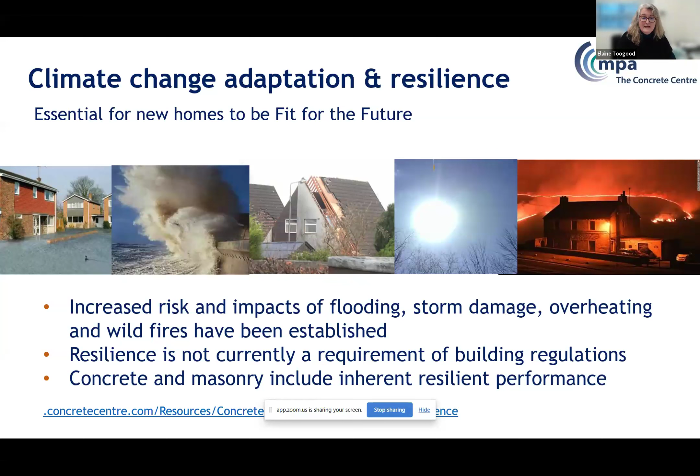But of course, quality and performance and sustainability isn't just there. There's a wide range, and we need to be reducing carbon emissions in new homes, so that's through energy use, but also through embodied carbon. And that embodied carbon piece is, as you might expect, a real driver for innovation with regards to concrete.

So it's a big area that I'm going to be looking at in this presentation. There is a huge amount of innovation taking place right now with regards to reducing the carbon footprint of concrete. Hopefully you're all aware that there is a UK concrete and cement industry roadmap.

It's been around for a few years now. It was published in October 2020, and that was already building on good work that was already in place and in action. There's been some good progress right across this whole range of seven technology levers that have been identified, all necessary to achieve beyond net zero by 2050. So far, a 53% reduction in carbon since 1990 has been achieved by concrete in the UK.

But of course, there's still more work to do, and there's going to be an update on progress published very soon. But you can get a lot of the details about those different technology levers through that QR code on the slide there.

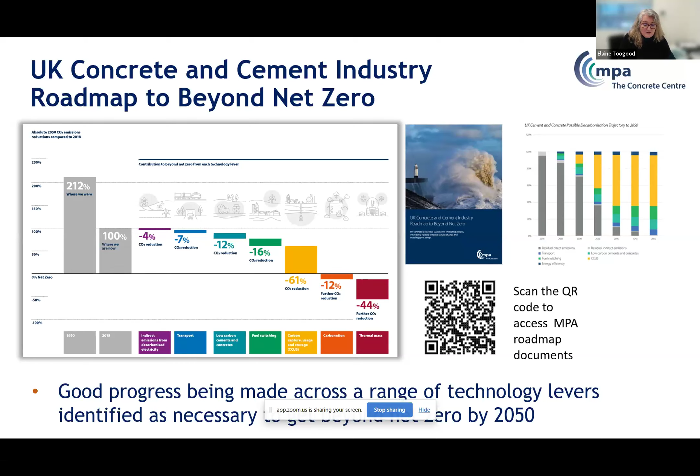Now, as I said, it's impossible to go through all the different action and innovation that's taking place, but I just wanted to draw attention to this article that was published just under a year ago. It's still a really good one to look up about the range of different things that are going on within the UK, and you can pick this up from our website.

In this presentation, I'm going to run through probably 5 or 6 themes of decarbonisation activity that's going on. So we'll do a quick fly through. The first one is innovation in manufacture of Portland cement.

For those who don't know, cement is the main thing that brings the embodied carbon to concrete, so there's a lot of focus on activity related to cement. Aggregates, which are most of what concrete is made out of, actually are incredibly low in carbon and usually locally supplied.

In the manufacture of Portland cement, about 30% of the carbon associated with that is a result of the fuels being burnt, since really high temperatures are needed. So fuel switching is one of the areas of early intervention the industry have been looking at. The latest figures available in 2022 show about 50% of the thermal input was provided by alternative fuels, a lot of them waste-derived, so switching away from fossil fuels.

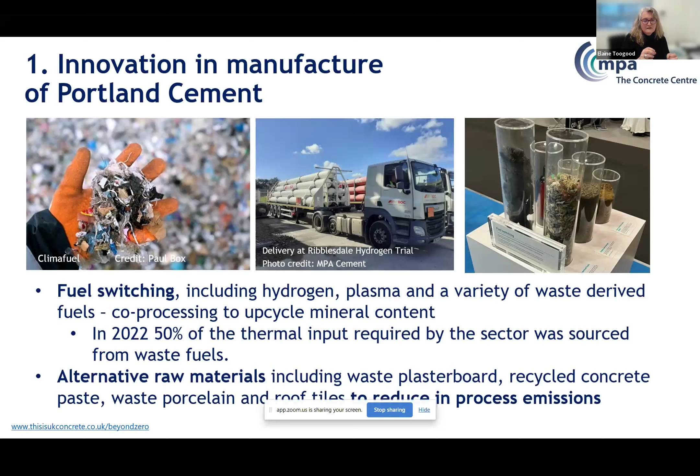It's not the only area of innovation with Portland cement. The other is alternative raw materials in the making of it, including waste plasterboard, recycled concrete, waste porcelain, and roof tiles, all to reduce in-process emissions — changing the recipe of the cement so less carbon is produced in the process.

Now, those process emissions are due to the chemistry of making and using Portland cement, and at the moment they account for around 70% of the overall carbon emissions associated with it. So these are going to need to be captured — carbon capture, use, or storage is going to be necessary to reduce these.

A few years ago, this technology was seen as quite futuristic, and a lot of people didn't really think it was coming off, but there's been significant recent progress. At the moment we are on track for the UK's first carbon capture cement plant to be up and running at Padeswood by 2029 — really exciting and significant progress there as one of those levers for decarbonisation.

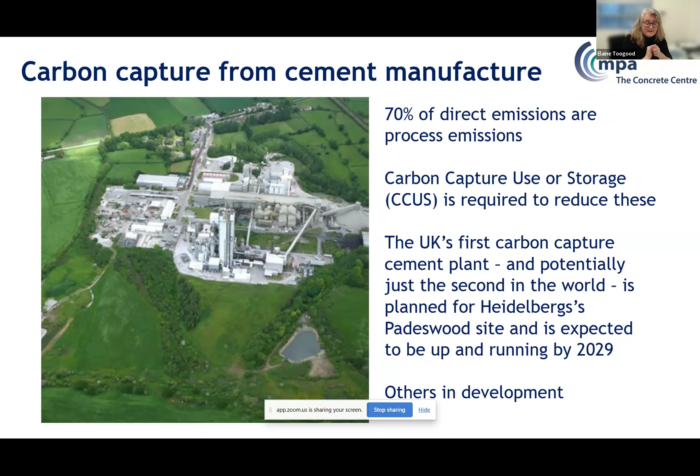There are lots of other sites as well that have been identified, and there's a lot of international collaboration to develop the technology for CCUS. The other area is lower carbon cements and concretes.

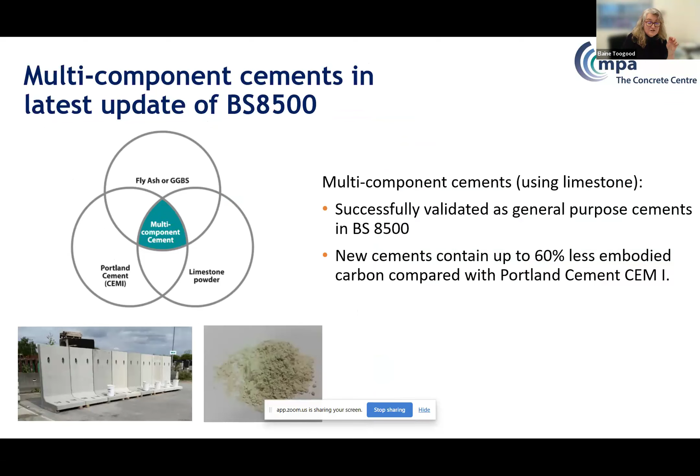This is a hugely exciting area of technology. Recently there's been new cements available through BS 8500, using limestone, which is less carbon — a different way of blending. There's different alternatives to reduce the amount of Portland cement, using limestone and either GGBS or fly ash. And calcined clay is hot on the heels of that.

There's another government-funded project that MPA have been running, looking at UK sources of reclaimed clay to be calcined and used as a potential alternative for expanding the range of lower carbon concretes available.

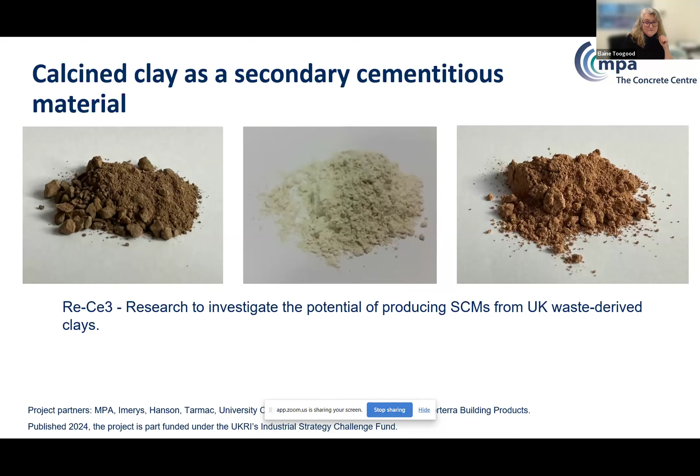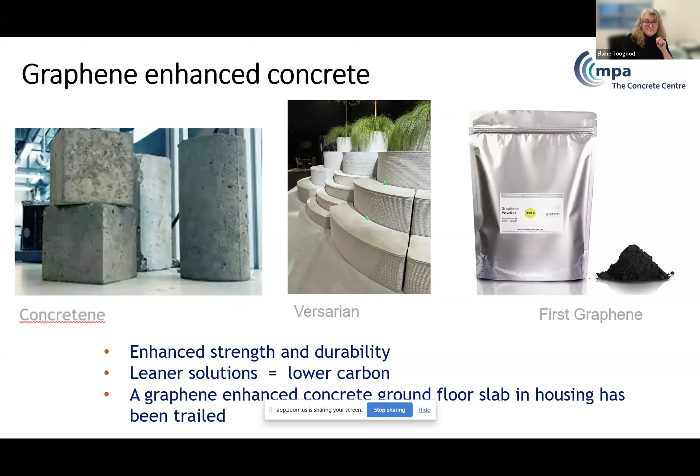Graphene enhancement is another area of interesting use. It improves the durability and strength of concrete, potentially providing leaner construction, so less carbon — whether that's in the making of the cement or as an admixture. There's interesting work being done by a variety of people across there, and in fact a concrete floor slab has been trialled in housing in the UK, as well as trials by some precasters using graphene enhanced concrete.

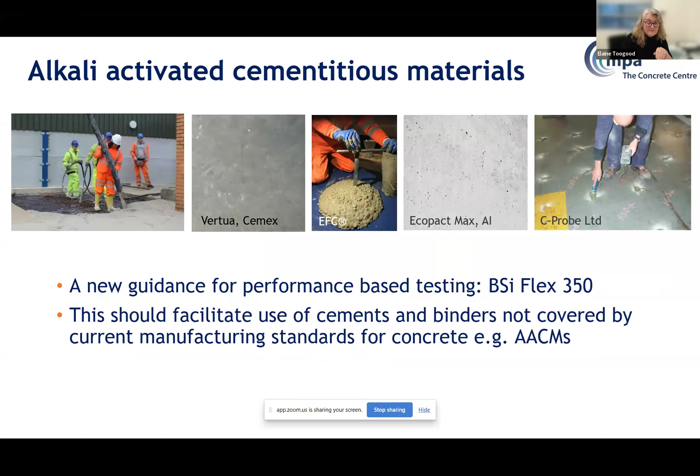There's alkali activated cementitious materials, another form of binder for concrete, becoming more available. There's a new PAS guidance that's been provided to help and facilitate the use of these types of cements, which are non-standard and not covered by current concrete standards.

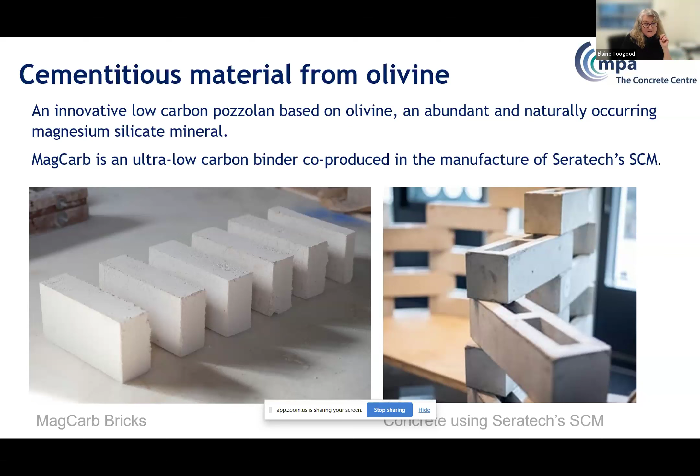There's also research and some trials starting for different technologies, different bases for binders, including Seratech's use of olivine as a raw material — a completely different technology as a basis for cementitious materials potentially to be used in concrete.

There's also new uses for recycled concrete, a really interesting area of activity — whether that's crushing the concrete at the end of its life to tap into its carbon capture potential, enhancing aggregates for use within concrete, or brand new concrete products being developed, such as that produced by Cambridge Electric Cement.

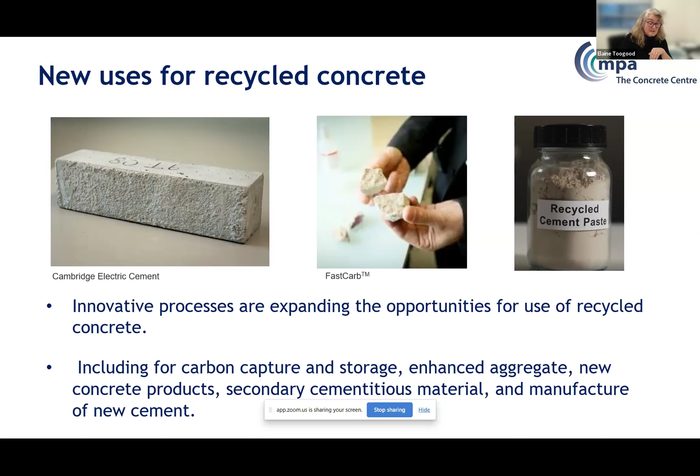It's also potentially, there's lots of research going into recycled cement being used as a secondary cementitious material and in the manufacture of new cement as well. A very exciting area of work that's going to reduce the carbon footprint for all concretes potentially, and that would impact on reducing the carbon footprint of housing in turn as well.

Another area is innovative industrial carbonation techniques, so that's about actually permanently embedding that captured CO2 into the concrete as part of the manufacture. It's another area of work, and there's so much more we could be talking about there, but we don't have time.

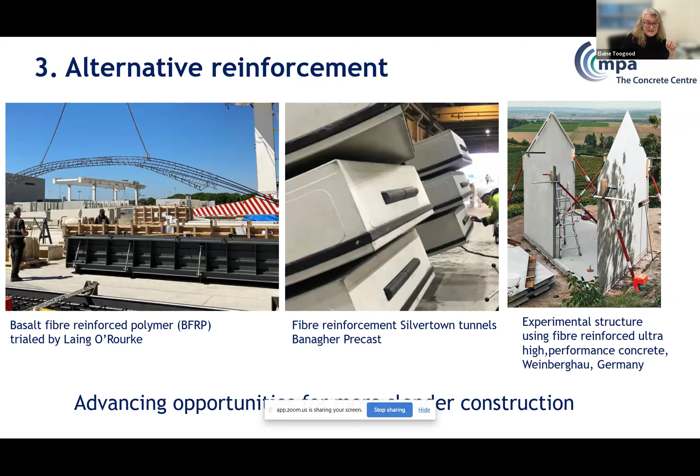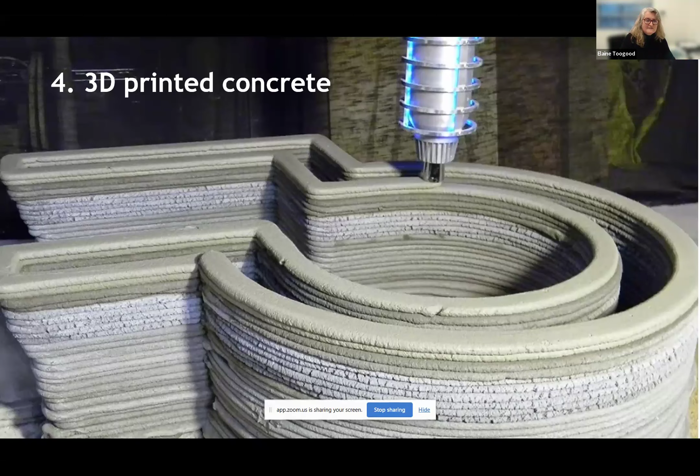So the third one is alternative reinforcement. Really interesting - if we can get alternative reinforcements in there, there's a real potential for leaner forms of construction. There's lots of research taking place by MPA members of precast, looking into getting more slender solutions by alternative reinforcements. 3D printing, obviously, that's usually the first thing people come to when they say I'm looking at innovative concrete.

It's a completely different way of transforming the way that we place concrete as well as make it. Now, in the UK at the moment, there hasn't been any homes built, or certainly not that I'm aware of - if anybody knows, tell me. But there has been a growing number of printed buildings and homes internationally, including both prefabricated 3D printing and in situ solutions. In the UK, there has been some trials for some infrastructure.

So this really complex bit of concrete that's been installed in Cornwall in 2023, and there's some other inspection chambers and things being manufactured. So it is a really interesting area of evolution, and I'd be remiss not to include it in this talk.

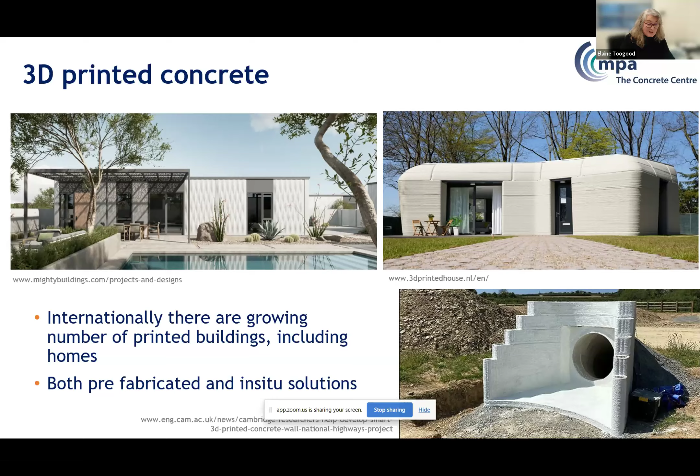But my final and fifth innovation relates to digital technology. This could be AI and machine learning in manufacture and construction. I'm not going to go into great detail because Dan is going to focus on some of the ways in which the PCE have been using this within construction, but it's a really important area and thread of enabling other technologies as well.

So whether that is about digital sensors being embedded within the concrete at the point of curing to facilitate early striking of some of these lower carbon concretes.

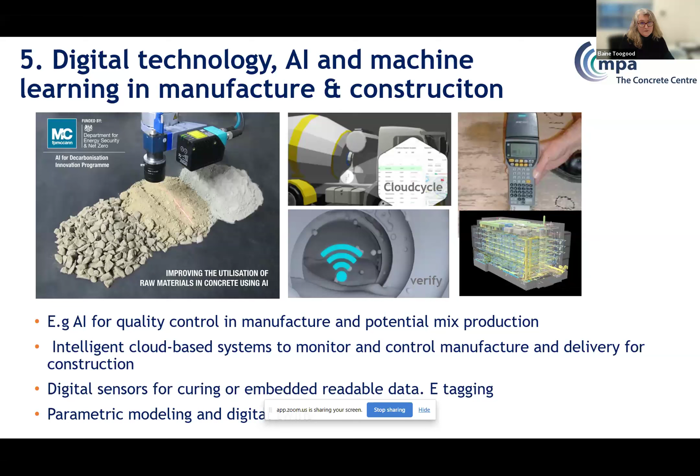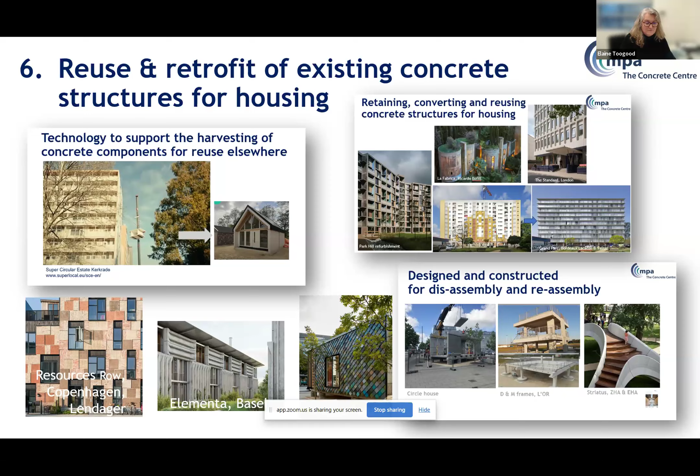So it's a really exciting area of research going on as well that can impact on the way that we build homes. So that was a very quick fly through - I hope you found that of interest. Of course, we've got lots of guidance on the website through various different places, and please do ask me some questions if there's anything else you want to find out a bit more about, but otherwise we're here to help.

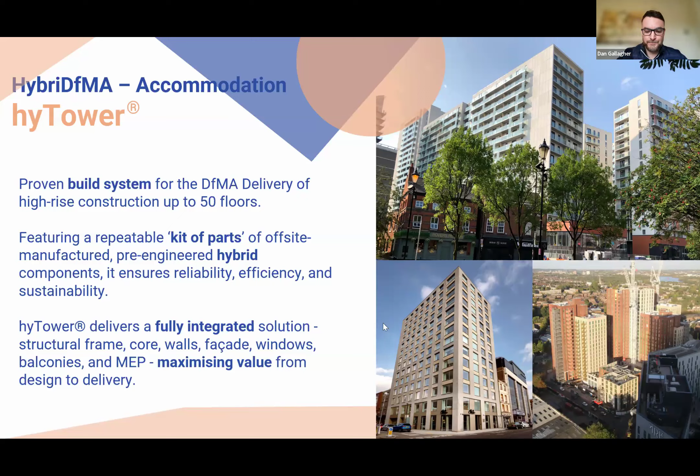A little bit more about the hyTower system specifically. It's founded on a kit of parts approach, so we pick our units from a systemized library. We then utilize digital technology in order to track those units throughout the concept design stage into detailed design, throughout the manufacturing processes, and then as they get to site, tracking where they go in, where they get installed on site, all of the QA around that, in order to make sure we've got that golden thread and single source of truth, which I'll touch on a little bit later.

As I've already touched on, the thermals and acoustics are a natural byproduct of concrete, and we also bring a lot more to the party in terms of air tightness. Passive house standards are something we can achieve utilising our system, as well as deploying it in areas like hospitals or research facilities that have high specification for things like vibration.

What we tend to find is that over traditional builds, we're up to 50% faster in terms of on-site activities. It does dictate that a lot more work has to be done off-site earlier, so that sometimes changes things like funding models, and people have to come with the right type of mentality in order to deploy a DFMA solution. But we're also then able to deploy fewer deliveries to site, reducing carbon footprints and disturbances to neighbours in tight inner city areas.

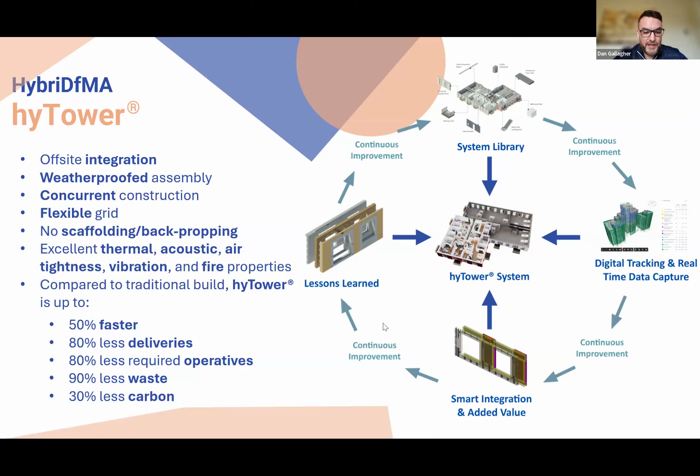Because we are able to refine the designs and do things in controlled environments, we also use a lot less materiality, whereas on site materials are brought, things are cast, and there's a lot of wastage that goes in the skip, a lot of formwork and what have you. We do everything fit for purpose in a controlled environment, which enables us to drive down that wastage factor, and as such we also get some better carbon credentials as well, which are really maximised when we do get that early engagement.

As a brief overview of what this DFMA journey looks like, we like to get involved nice and early. That enables us to talk to the client team and the wider design team and ensure there's no decisions taken which funnel us down the wrong avenue, where we're then trying to put a square peg in a round hole with regards to a traditional build versus trying to deploy a DFMA solution as best we can.

We do a spatial design in order to make sure we're hitting the architectural and engineering intent, and then move that through stage 4 into detailed design, at which point we produce shop drawings. That goes into a manufacturing environment where those units are produced off-site, QA'd, and tracked digitally until it's ready for on-site, transported to site in a controlled fashion, in line with the pre-developed build sequence. Then we have the lifting and installation sequencing on site, in a systemized approach.

This enables us to hit cycle times that often start a little bit slower, but once everybody understands how things come together and the predictability factor starts to kick in, those cycle times decrease over time until the building is complete. And then we have the handovers for the end client.

Because of the digital twin technology we deploy and that traceability, the birth certificate that stays with every unit from the spatial design stage right through to handover will track everything from materiality, who manufactured it, what's been cast into it if it's a precast piece of concrete, all of the structural tie connections, any remedials, and its specific geolocation on site, so everybody understands the full history of that unit until it's in its final resting place.

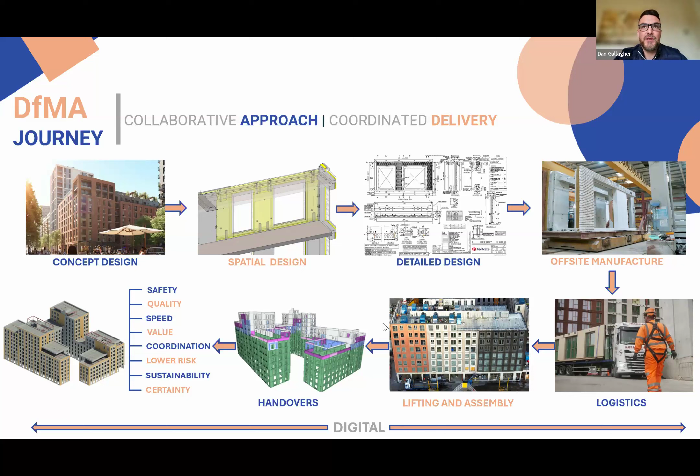The predictability itself carries less risk through to development at the project stage, so people understand what's happening day to day, hour to hour, so that you can plan accordingly, which is inherently also a lot safer. And then we're able to drive down those sustainability credentials as well by really refining that design and offering our clients the certainty that they need.

So this is the RIBA stages of work, for those familiar with it. Most people are familiar with these stages. I'm not going to go into too much detail, but the thing I really want to hone in on is that whilst people understand the RIBA stages of work, not everybody is aware that there is a DFMA overlay for the RIBA stages of work, which are specific to deploying an offsite strategy.

We feel it's absolutely key that we get involved as early as possible in order to fully harness all of the benefits of a DFMA strategy, so that we can then go through the develop design, the manufacturing strategy, and the on-site assembly strategy with all of the positives that can be deployed from an MMC solution.

As I've already touched on with some of these benefits, we do optimize the design. We feel we can look at other avenues, as Elaine has touched on, better forms of concrete where it's practical. We can look at reinforcing, or only providing reinforcement in areas required based on the strengths needed, rather than traditional reinforcement everywhere to a particular standard. That enables us to really drive down reinforcement content.

We've got the waste reduction, which I've already touched on. We value engineer, which is often something that's challenging on a project when people are trying to drive down costs or understand how they maximize what they're paying for. And that added value and coordination piece enables us to cast things into our precast products that then facilitate follow-on trades.

So we put the openings in our units that allow the ductwork to come through, predefined and fire stopped. We have single risers that get dropped into place, so it's a single plug and play system. And we really do that by buying everybody into the team and being able to get them on board with that DFMA strategy.

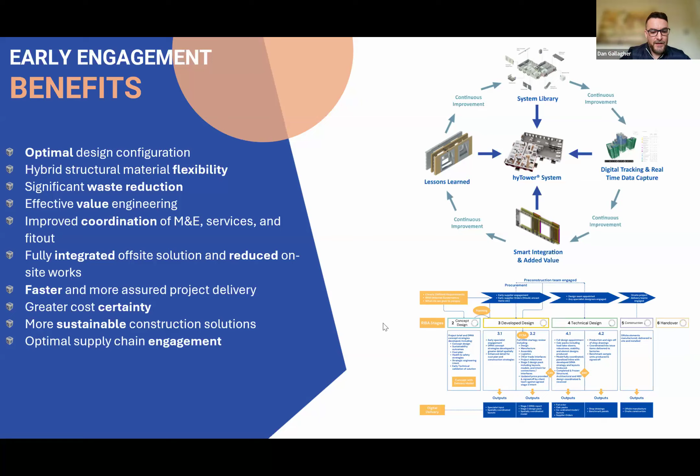The real strength of being a hybrid DFMA solution is that whilst precast concrete has an awful lot going for it, one size never always fits all, unfortunately, and we recognise that. Because we don't own any manufacturing facilities, we instead rely on the supply chain and the good relationships we have. We're able to procure the products we need and put them in the right place at the right time, so we're putting our best foot forward for project delivery.

So that sometimes emanates in terms of precast concrete beams and precast concrete slabs, but it could also be timber, it could also be composite beams. We're not really hung up on doing it one way. We instead look at all the credentials of pulling all of the kit parts together in order to get to the best solution possible.

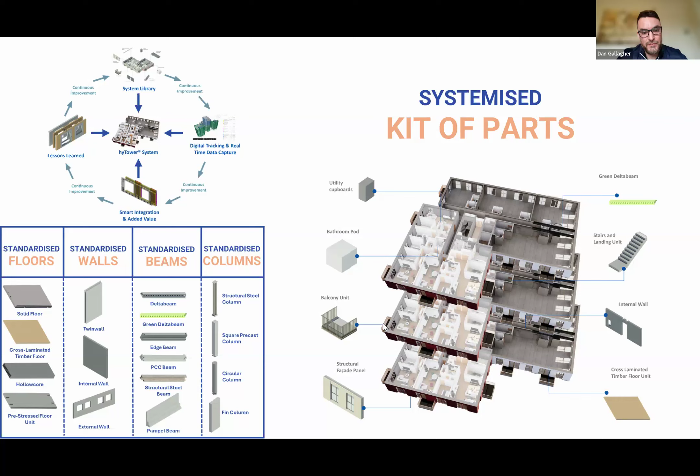That systemized approach and the predictability it brings means we're picking things out of a catalogue that have been tried and tested. They've been through thermal, fire, water, acoustic testing, air tightness and vibration testing, and we're able to demonstrate and validate and verify to our clients that what they're purchasing is fit for purpose. And we have all the traceability throughout the digital twin tracking in order to justify that.

The integrated systems, the facades can be brick, concrete, coloured concrete, or patinated concrete. We're able to install the windows into the panels as well, which gets away from any scaffolding around the outside because it's an integrated part of the system. Integration with the MEP, as I've already touched on, casting things in or facilitating underfloor heating being in place, so it's just tested on site rather than off-site.

And then we can drop in things like pods or risers whilst we're building, so that we've got fewer trades on site. We're not bringing other people in, so the client only has to deal with us, and we're bringing that added value. We're also able to install things like balconies and roofing at the same time, which again just drives down that manpower on site.

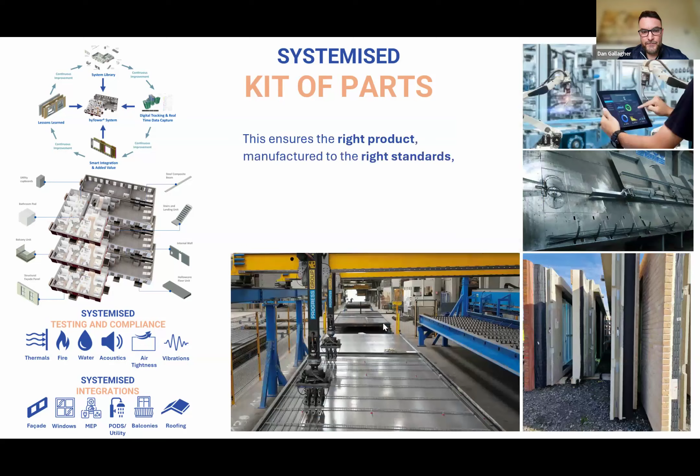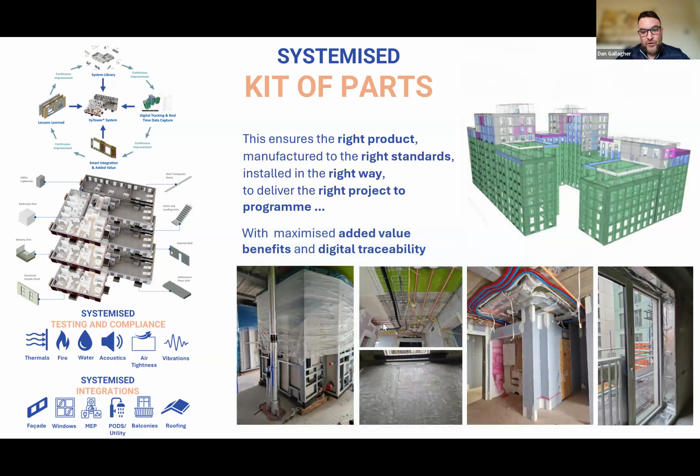So as I've touched on, that enables us to get to a place where we're putting the right products in the right place, doing it to the right standards. We have data backing up our solutions, making sure they're fit for purpose, they're robust. As Elaine touched on, we want solutions that can stand the test of time. And then we're able to track it all and provide transparency to our clients through digital traceability.

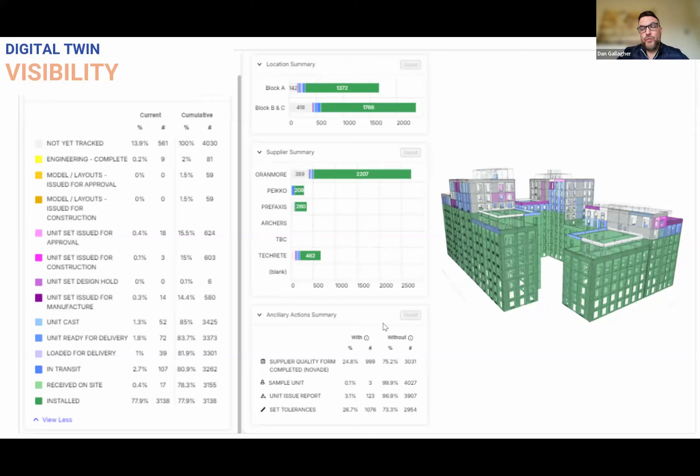So just touching on that digital twin visibility, this is something we've developed in-house because we're absolutely adamant that we don't just want to utilize it for our own benefits. We want to give that transparency to the client team so they understand whether we're on program, where problems might be, but probably more importantly, how we're progressing with regards to the program, so they can start thinking about those follow-on trades in order to reduce the overall times for on-site activities.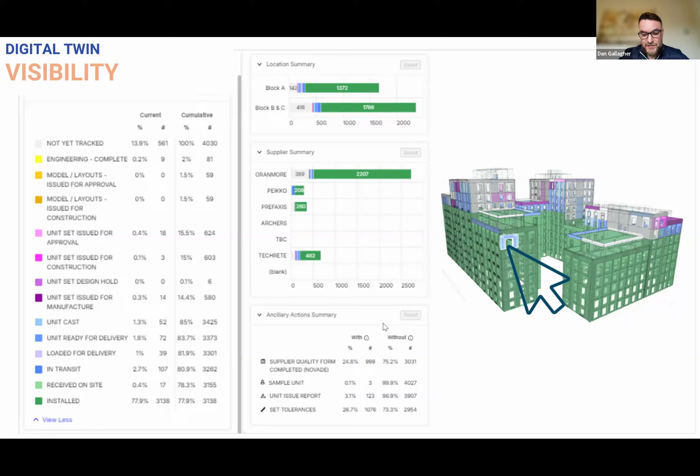And we do that using a system called Winomia, which takes elemental pieces of the overall structure and tracks them throughout the design process, throughout the manufacturing process, and throughout the on-site process. So in this instance specifically, we can click on one unit and have the full history of that unit with regards to the journey it's been on through its manufacturing and design process until such time as it gets to site.

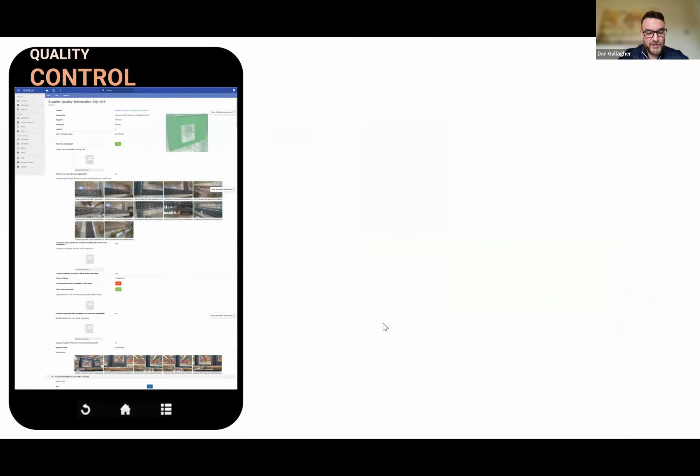This is all done in a digital twin. So as people are quite familiar with 3D technology these days, you can rotate, you can zoom in, you can find the unit specifically you're looking for, you can click on it, it will expand out, it will give you imagery with regards to that journey it's been on, it will give you all the details about it.

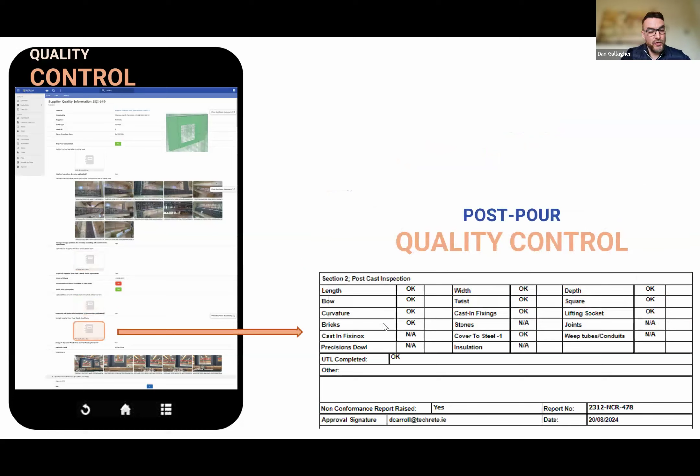And then it can give all your documentation that sits behind it as well, whether that's the quality control, the photos, or the sign-offs, just to validate that it's ready to come to site and can be installed. And that's the full digital twin technology throughout, as I say, all three parts of the project: your design, your manufacture, and your construction.

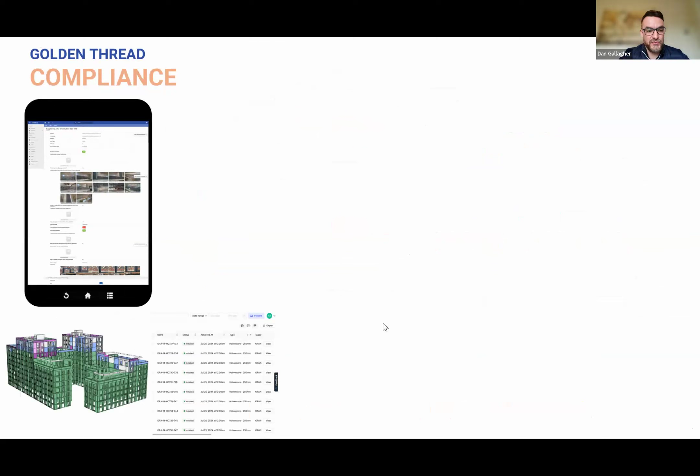And we really feel that in order to do that, if ever we need to come back and find information through O&M manuals rather than trying to find paperwork or individuals, it all resides within a 3D environment where people are free to go and find that information, whether it's design related, quality related, or structural integrity or fire related.

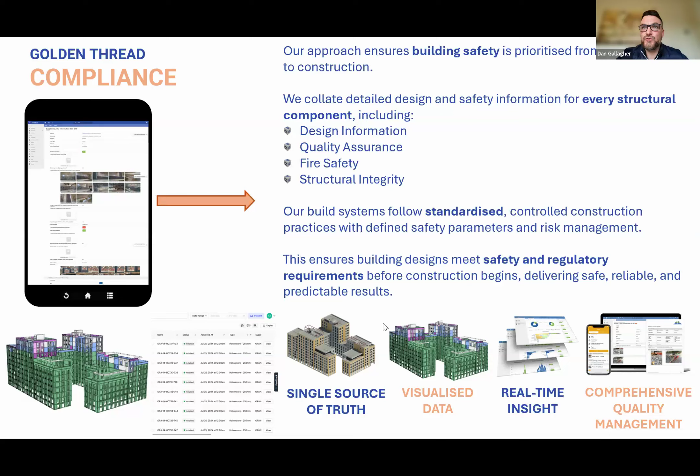So all of that enables us to have a single source of truth which aligns to Gateway 2, making sure everybody understands where they're going in order to find that information they require for their project. It's visualized, so it's easily accessible. Throughout project delivery itself, it gives real-time insights and visibility client side, so people can understand how their projects are progressing. And all of that enables us on site to have a comprehensive management tool for understanding where we need to focus our attentions at any given time.

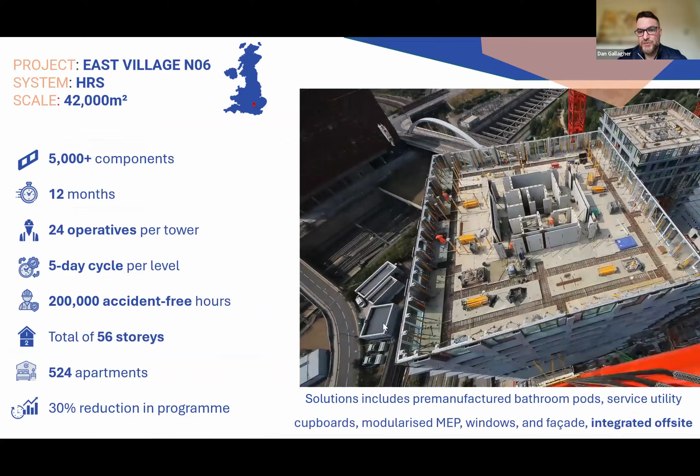Just a few working examples now. This one is a project that has already been delivered. The video on the right-hand side is really demonstrating those cycle times I spoke about with the repetitive nature of things being installed. You'll be able to see the core in the middle, and you can see some pods being dropped in with that added value piece.

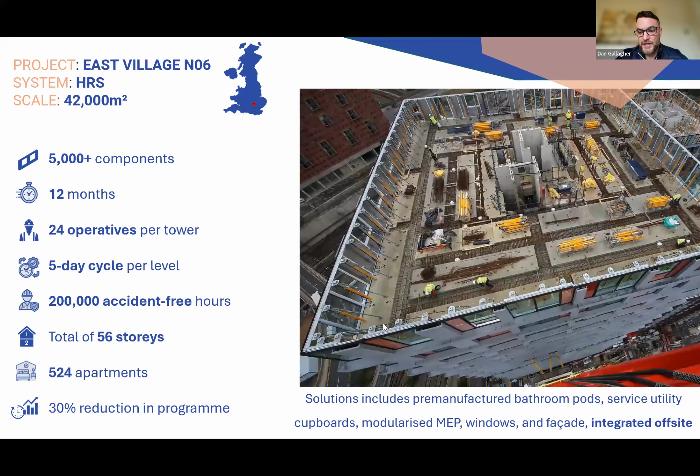But this is a high-rise residential scheme called N06, which is East Village in London. This had over 5,000 components and took only 24 operatives to build, and it delivered 524 apartments. And over the original scheme, which was an in situ scheme, the client confirmed that we were 30% quicker than if they had gone with a traditional build solution.

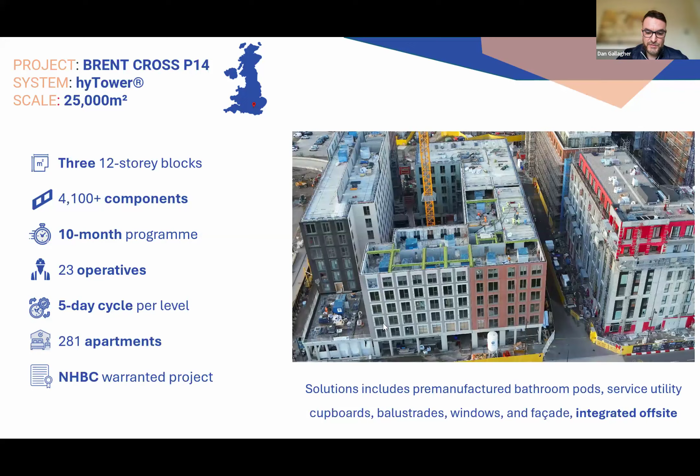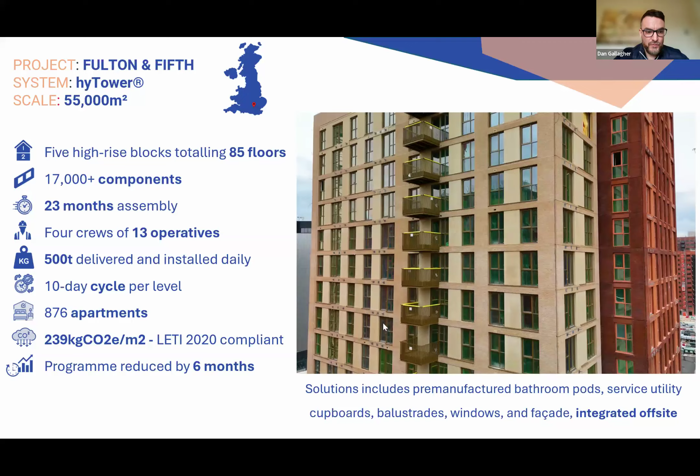Again, another project in the centre of Wembley. We've got the Wembley Arch in the background. This is five towers that we're currently delivering. It's a 10-day cycle typically for being able to go from level to level, so we've really refined the ability to build with speed and certainty. And we're on site for about 23 months, installing just over 17,000 components.

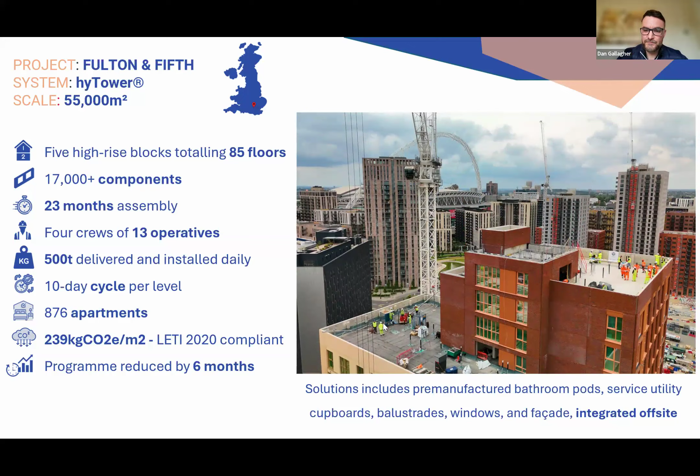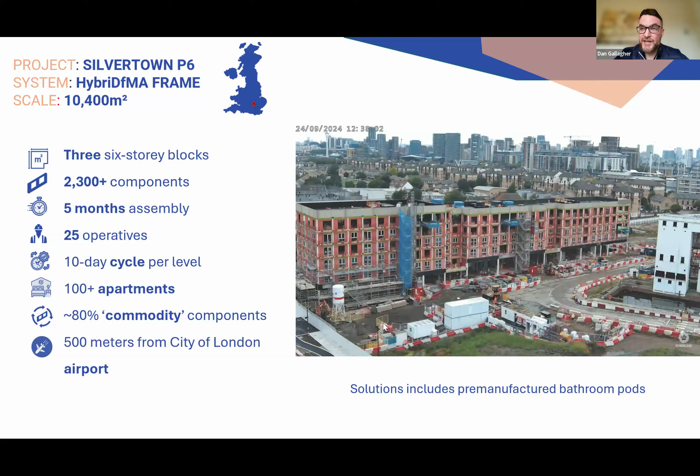And then finally, just a bit of a digital representation there on the first image, and then a cycle showing how we've delivered a project called Silvertown Plot 6. This encompassed some affordable accommodation as well as some shops and office space and what have you. So there's lots of different ways that we can try and answer this housing crisis, and we've got a lot of solutions in hand and innovation that's ongoing in order to try and do that.

And that's me. I'd be more than happy to take any questions. Thank you for your time.

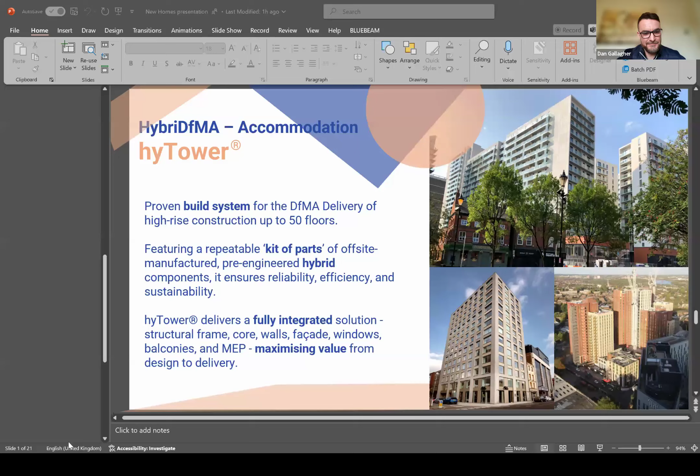Thanks, Dan. I think that was brilliant. Lots of really good stuff there. I think Laura might have dropped off the screen, so I think it's going to be you and me having a chat about this and seeing if we can answer any of the questions that have come through. So I'm just going to have a little look.

It's very impressive when you just add up the number of homes that were on those three projects that you talked about, and how fast they were being delivered, as well as that quality we were talking about before. Yeah, that's very impressive. So there are a couple of questions in here.

Somebody has asked about the challenges and opportunities for DFMA, specifically asking about the research challenges. I'm not sure if that's related to what the research is, but there obviously are challenges and opportunities. So if you were going to advise somebody who was thinking about doing it right now, what would be the first thing you would say to them in terms of limiting or overcoming some of those challenges of implementing DFMA on a project?

It's a really good question, and it's a question that gets asked quite a lot, in all honesty. Because it is a relatively new form of construction, I think the biggest hurdle that we have to overcome, Elaine, is a change of mentality. As I touched on, it sometimes dictates that people have to take decisions a little bit earlier. Funding models have to change. People have to spend cash at a point in time where they're not really used to spending cash, which probably brings with it a little bit of uneasiness. So the best thing that people can do in order to deploy it is bring people in early, and make sure that people understand exactly what a DFMA solution entails.